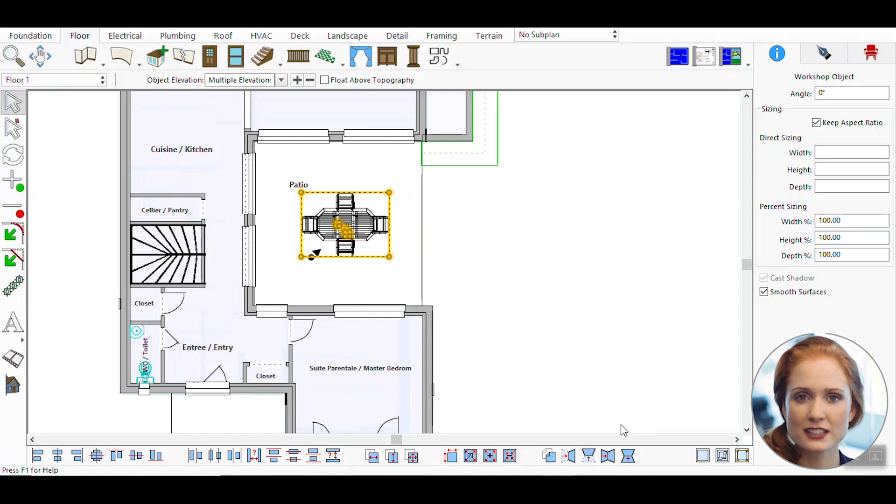Open your 3D design software and either create a new project or select an existing one to work with. Switch to the split view mode to see both the 2D floor plan and the 3D rendering simultaneously. This helps you visualize how changes affect both perspectives.

Identify the portion or objects where you want to apply the depth of field blur effect. Use the selection tools to highlight these areas. Navigate to the rendering menu under the 3D settings. This is where you'll find the options to adjust the blur effect.

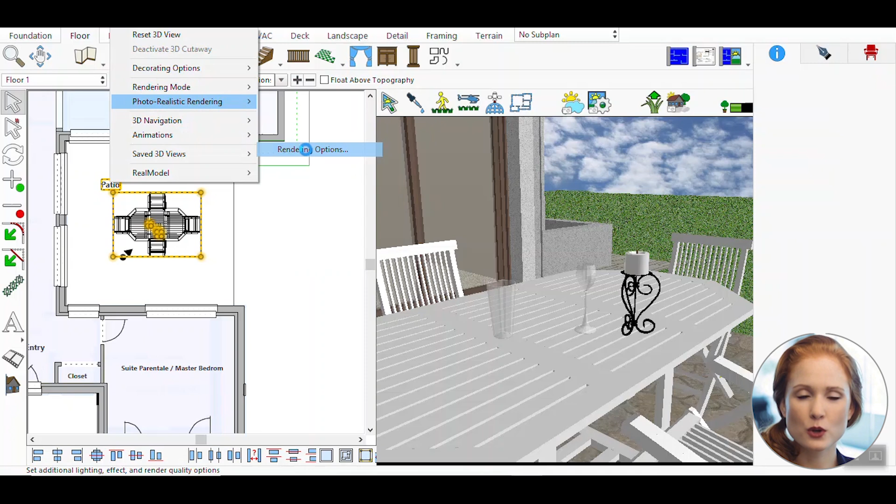Select Photo Rendering Options to access advanced rendering settings that include the depth of field blur effect. Here, you can adjust the rendering time limit, post effects, and other parameters. Focus on setting the depth of field blur effect. Choose the desired blur intensity. For this example, we'll start by setting it to no blur to see the baseline effect.

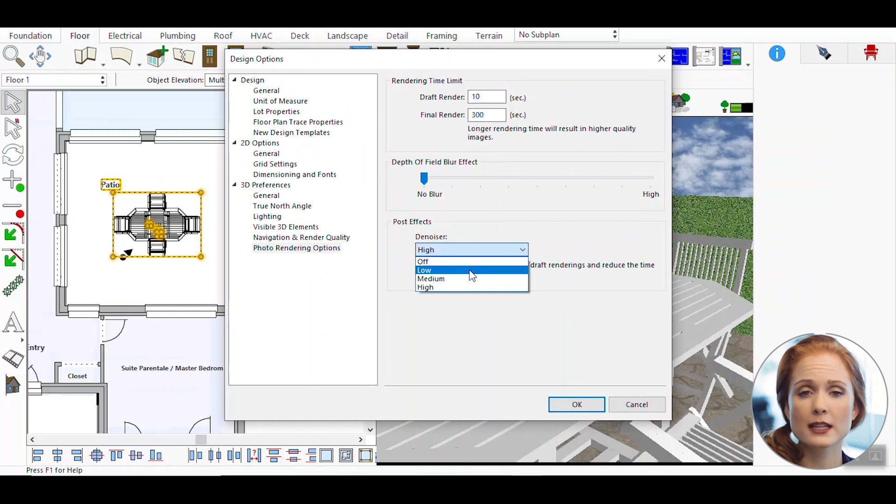Click the OK button to apply the current settings and return to the main interface. Go to the rendering menu and select Render Preview. This will give you a quick preview of how the scene looks with the applied settings. If you're satisfied, you can proceed to Render Final for a high-quality output.

After rendering, observe the final output. With no blur, the entire scene appears sharp and detailed, as shown here.

Return to the rendering options and change the depth of field blur effect to high. This will create a pronounced blur effect, drawing attention to specific focal points. Set the blur level to high and confirm your choice by clicking OK.

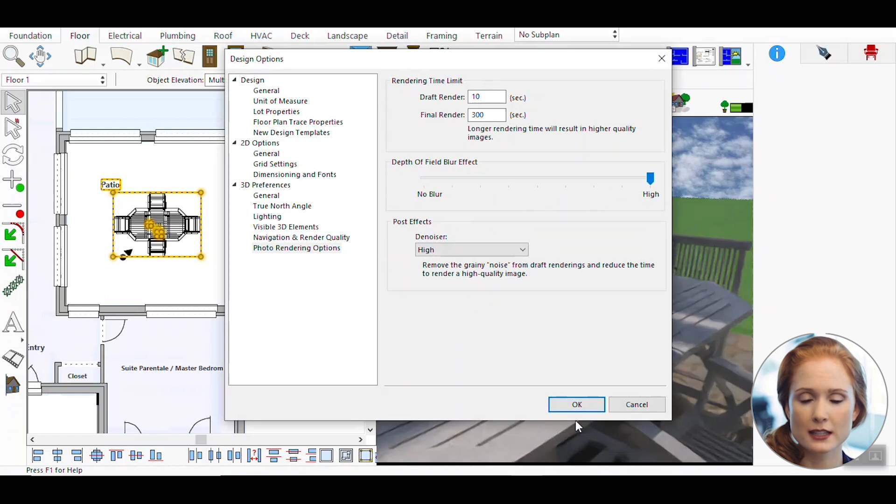Select Render Preview once more to see the updated results. This time, you'll notice a noticeable difference in depth and focus. The rendered scene now shows a strong depth of field, with certain elements sharply in focus while others are artistically blurred, creating a more realistic and visually appealing composition.

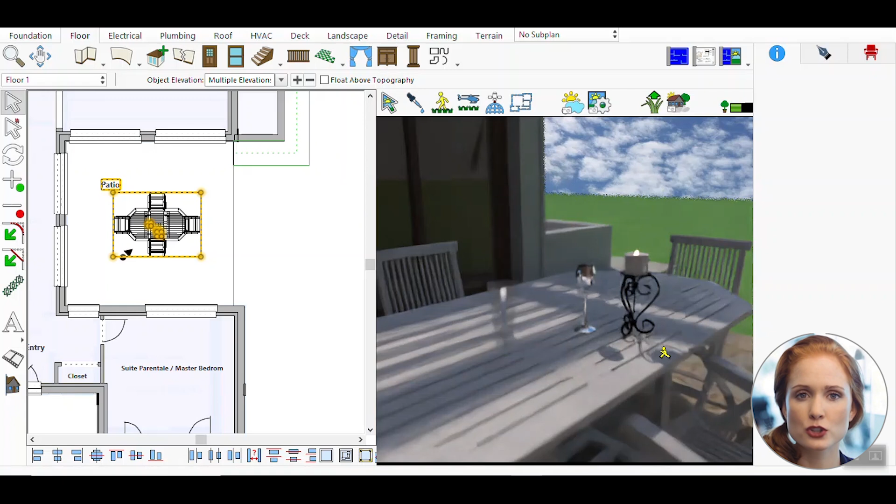By saving both versions with no blur and high blur, you can easily compare the differences. The high blur effect enhances the sense of depth and directs the viewer's attention to key areas of interest.

That's it. You've successfully used the depth of field blur effect to enhance your 3D designs. This technique not only adds realism, but also helps guide the viewer's eye to the most important parts of your scene.